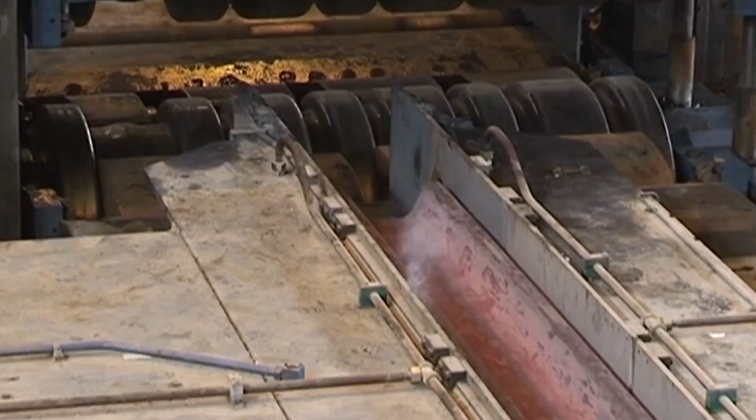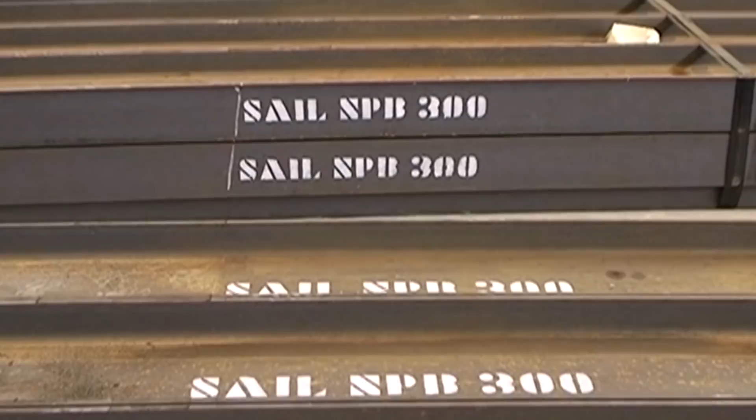Steel Authority of India Limited (SAIL) is the largest public sector steel producer in the country, which produces a wide variety of steel products at its state-of-the-art integrated steel plants across the country. After its modernization and expansion program, SAIL has a production capacity of about 2 million tons of structural steel, which makes structural steel an important contributor to the company's bottom line.

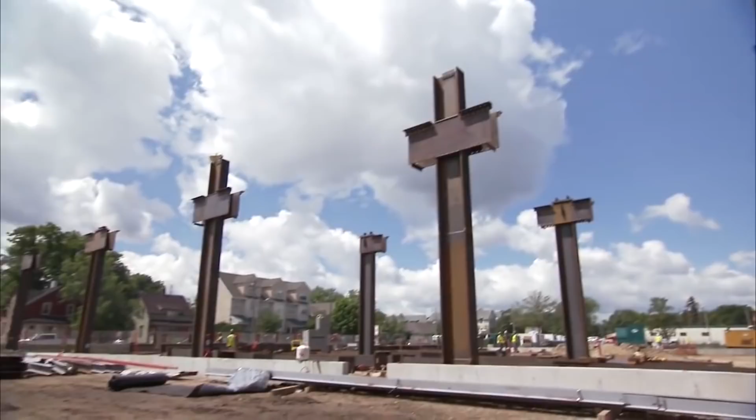Architects and builders are using structural steel to make buildings lighter, economical, safe, sturdy, and aesthetic in today's time and age. Such steel sections are replacing concrete sections due to their time-saving construction, as well as high strength-to-weight ratio. The high-rise structures today are constructed mostly using structural steel.

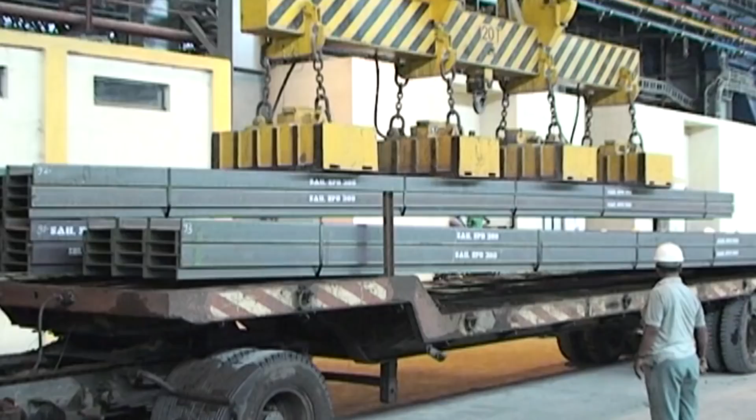Structural steel sections are a category of steel that are produced in a particular cross-section or shape and have specified chemical composition and mechanical properties for use in structural work. The shapes, sizes, composition, strengths, etc. of such sections are regulated by standards in most industrialized countries. Broadly, rolled structural sections are categorized into three types: angles, beams or joists, and channels.

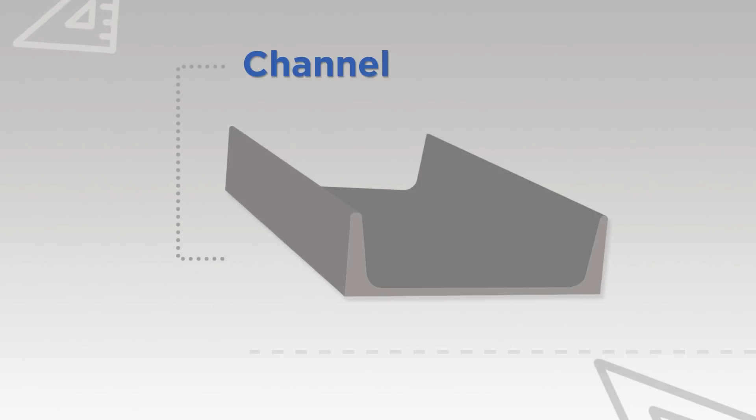In India, BIS codes regulating the nominal dimensions, mass and sectional properties of hot-rolled structural steel sections are IS 808-1989 for angles, channels and tapered flange beams, and IS 12778-2004 for parallel flange beams and columns.

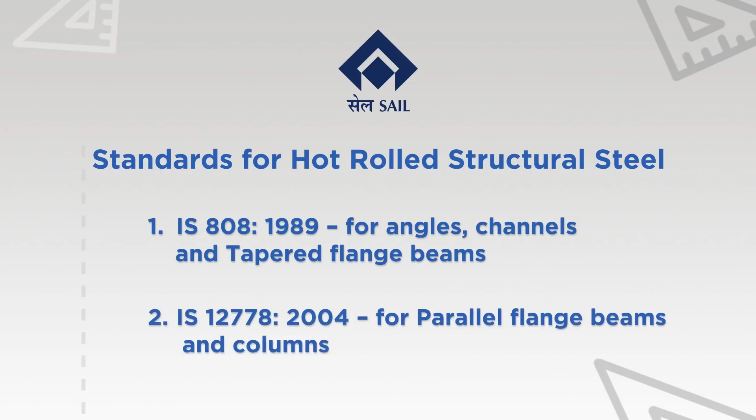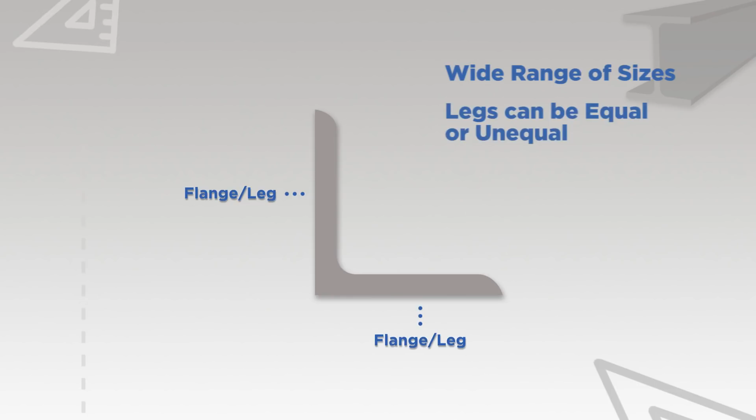Angle section. An angle section consists of two flanges, legs perpendicular to each other. They are available in a wide range of sizes in terms of their leg lengths and thicknesses. The legs can be equal or unequal depending on the requirement. Angles are designated by the length of their legs and the thickness of the leg. For example, 50 by 50 by 6 represents an equal angle with leg length of 50 mm each and thickness of leg of 6 mm.

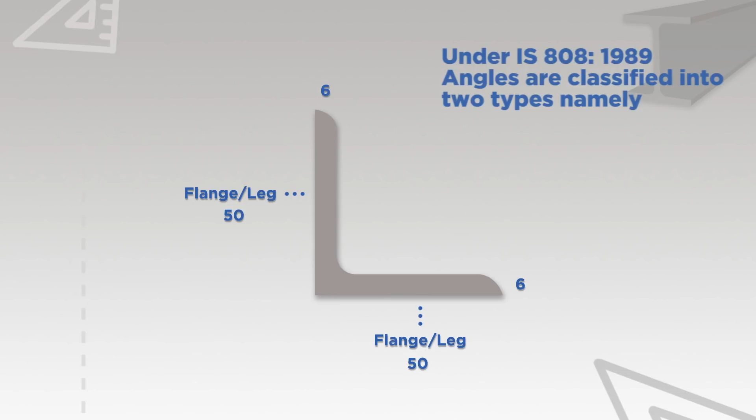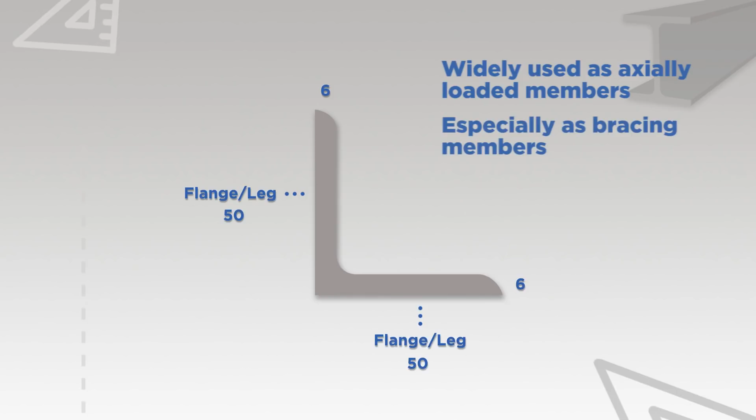Under IS 808-1989, angles are classified into two types, namely Indian Standard Equal Angles and Indian Standard Unequal Angles, both being designated as ISA. Angles are therefore widely used in structural design as axially loaded members, especially as bracing members. In a typical building construction, their usage as wall panel framing members and stiffeners in plated construction also is quite common, effective and efficient.

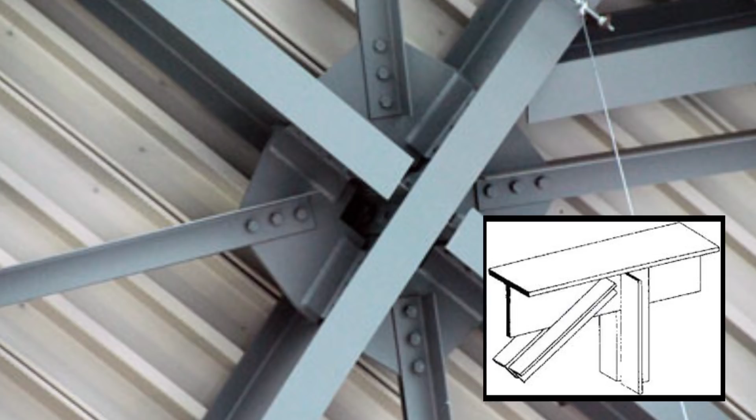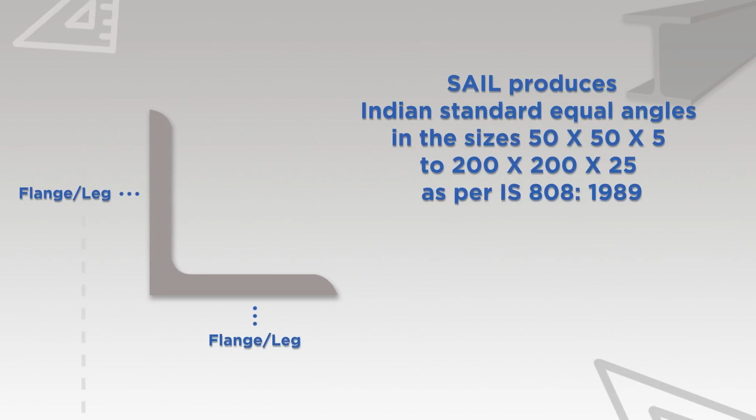SAIL can produce equal angles in the size range 50 by 50 by 5 mm to 200 by 200 by 25 mm with sectional weights ranging from 3.8 kilograms to 73.9 kilograms per meter.

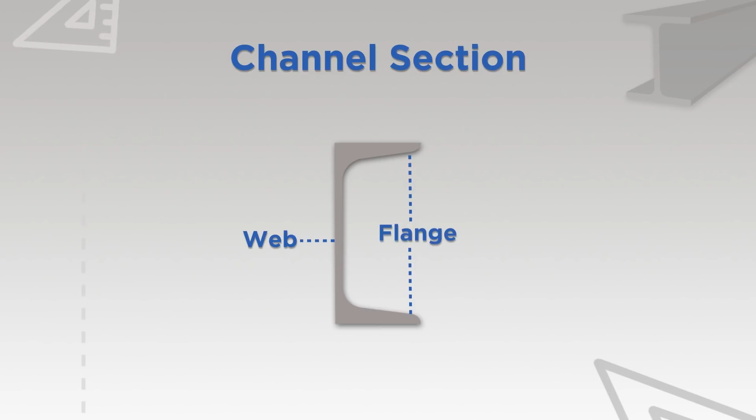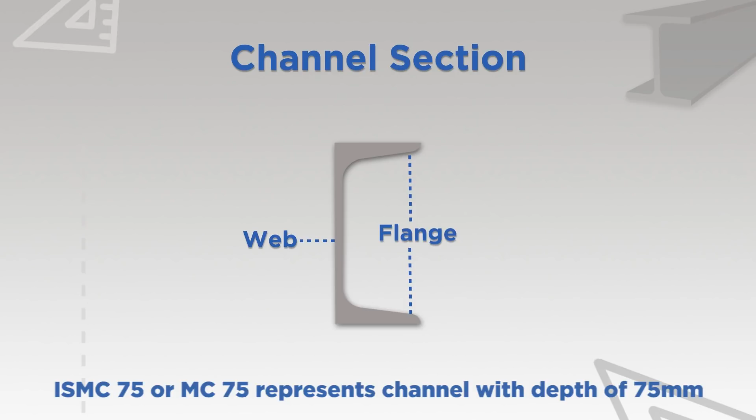Channel section. A channel is a hot-rolled steel section having a vertical web joining the top and bottom horizontal flanges with inside radius corners. Channels are designated by their abbreviation and the depth of the section. For example, ISMC 75 or MC 75 represents channel with depth of 75 mm. In some cases, the channels are designated by the depth and flange width, such as 75 by 40 mm.

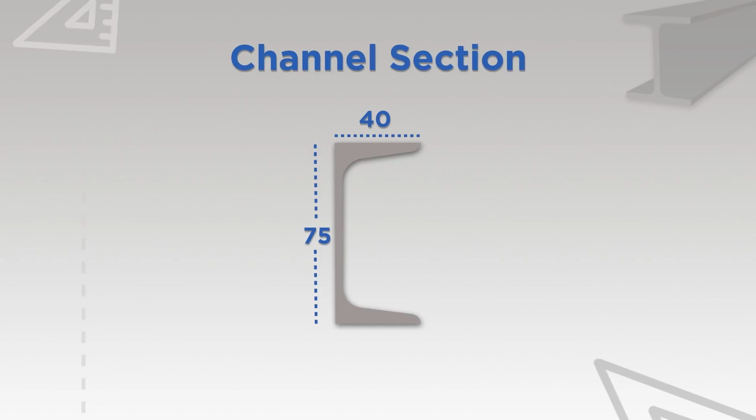The flanges separated through a web render the section a reasonable moment of inertia and section modulus. But due to lack of symmetry about the minor axis, the shear center of such section lies outside the section, which in turn makes the section unsuitable for carrying loads and bending moment about its major axis for a longer span unless the section is effectively restrained against torsion.

But combining two such sections using suitable battens, lacing or bracing, if the missing axis of symmetry in the resulting section is restored, it can be used as a significant load-bearing member in a structure. SAIL can produce ISMC 75 to 400 as per IS 808-1989 and UPN U section 200 to 400 as per DIN 1026.

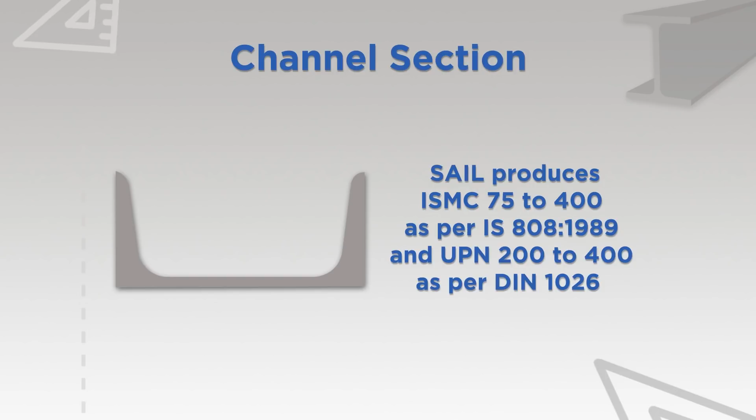Beam section. This section consists of two flanges connected by a web at the center, like an I or H. Presently, two types of rolled beams are available, that is, beams having tapered flange sections, whose inside flange surface is tapered, and beams having parallel flange sections, whose inside flange surface is parallel to the outside flange surface.

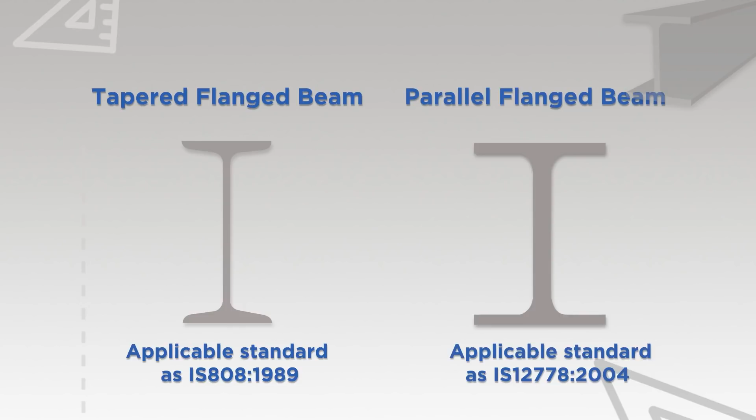Beams with tapered flange sections are covered under IS 808-1989 and beams with parallel flange sections are covered under IS 12778-2004. Under IS 808-1989, beams are classified into 4 classifications, namely Indian Standard Junior Beam, ISJB or JB, Indian Standard Lightweight Beams, ISLB or LB, Indian Standard Medium Weight Beams, ISMB or MB, and Indian Standard Wide Flange Beams, ISWB or WB.

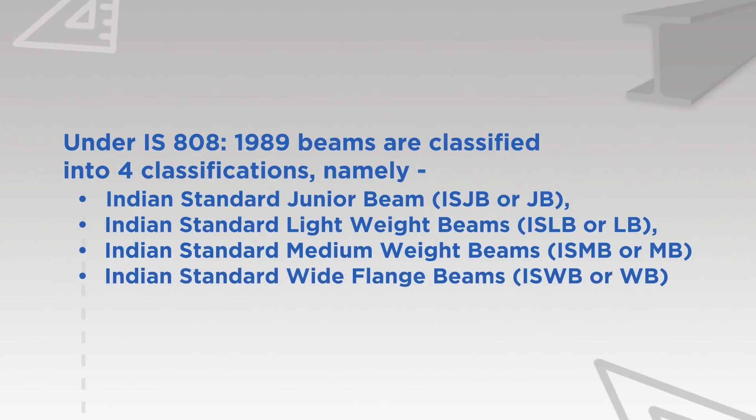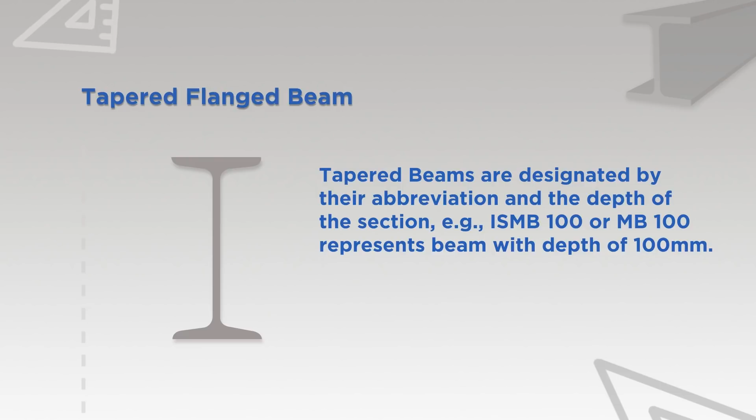Tapered beams are designated by their abbreviation and the depth of the section. For example, ISMB 100 or MB 100 represents beam with depth of 100 mm. SAIL can produce MB of depth 100 to 600 mm.

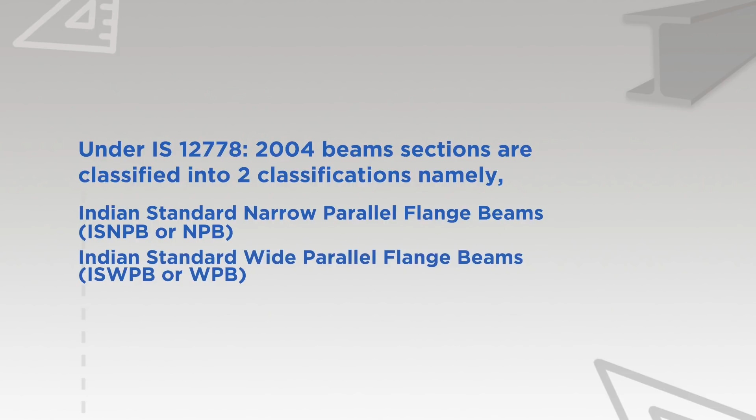Under IS 12778-2004, beam sections are classified into 2 classifications, namely Indian Standard Narrow Parallel Flange Beams, ISNPB or NPB, and Indian Standard Wide Parallel Flange Beams, ISWPB or WPB.

Narrow parallel flange beams are doubly symmetric shapes, generally used as beams whose inside flange surfaces are substantially parallel to outside flange surface. Beams under this standard have flange widths generally lower than the depth.

These beams are designated by their abbreviation, the nominal depth, nominal flange width, and mass of the section in kilogram per meter. For instance, NPB 160 by 80 by 15.77 means a nominal depth of 160 mm and a nominal flange width of 80 mm with mass of 15.77 kilograms per meter.

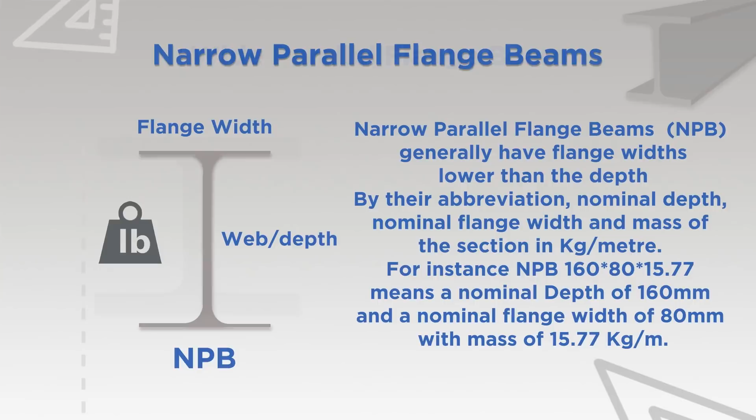Wide parallel flange beams, WPB, with nominal depth up to 300 mm have nominal flange widths same as the nominal depth of the beam.

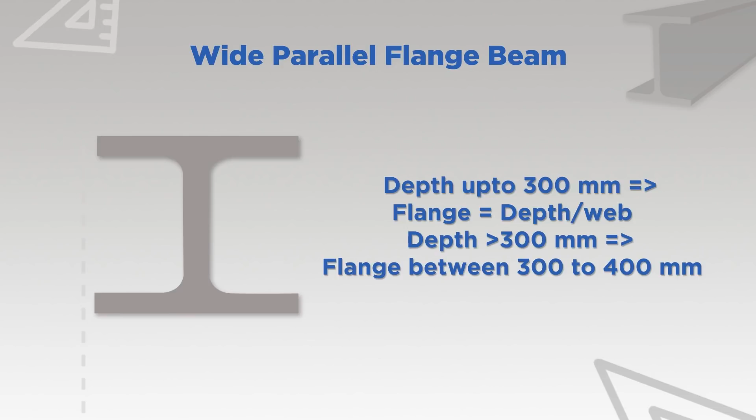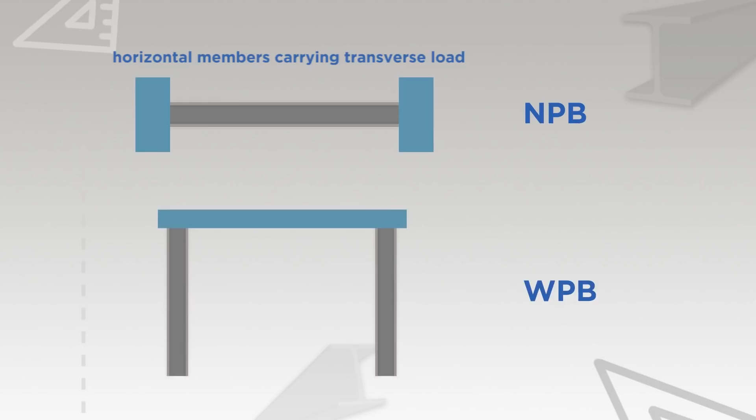WPB with nominal depth above 300 mm have nominal flange widths of 300 to 400 mm. Similar to NPB, WPB are also designated by their abbreviation, nominal depth, nominal flange width, and mass in kilogram per meter, for example WPB 160 by 160 by 23.83. NPBs are generally used in beam sections, that is horizontal members carrying transverse load, whereas WPBs

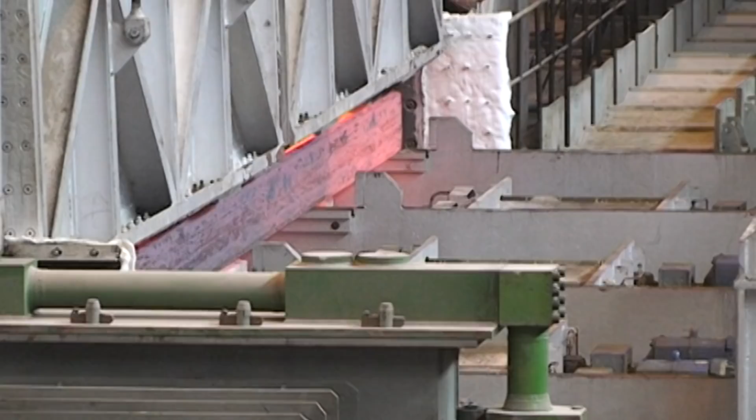are generally used in column sections, that is vertical members carrying axial load. Due to emphasis on economical use of steel in construction and better sectional properties, parallel flange sections are being preferred. SAIL produces parallel flange sections at its state-of-the-art universal mills at ISP Burnpur and MSM Durgapur. SAIL produces NPB of 100 to 750 mm depth and WPB of 100 to 450 mm depth.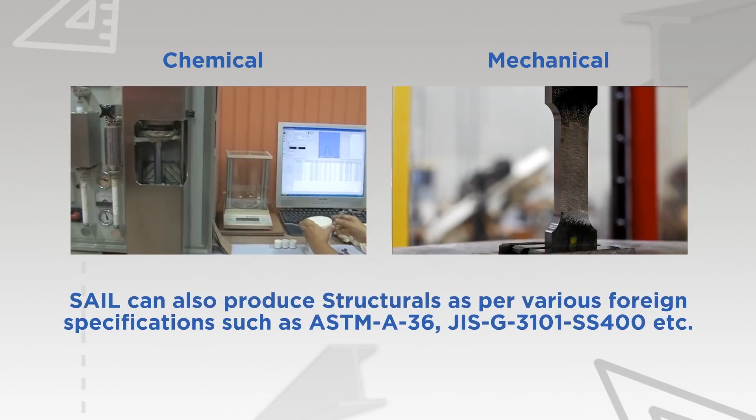SAIL can produce structurals with chemical composition and mechanical properties as per IS 2062-2011. SAIL can also produce structurals as per various foreign specifications such as ASTM A36, JIS G3101, SS 400, etc.

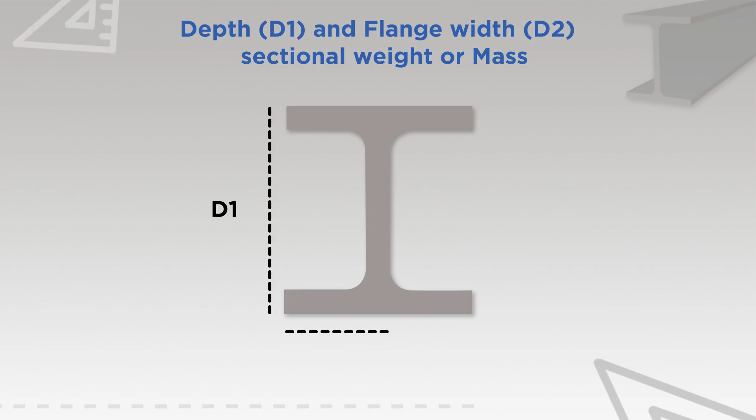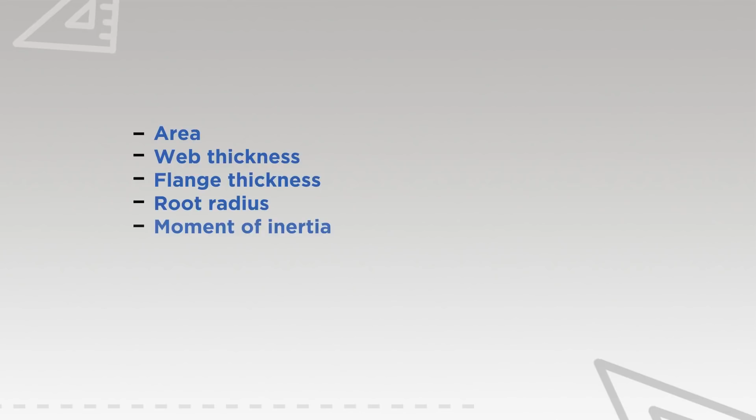When a structural engineer chooses a structural section of given depth D1 and flange width D2, and sectional weight or mass in kilogram per meter, along with this choice, he automatically chooses the sectional properties like area, web thickness, flange thickness, root radius, moment of inertia, radius of gyration, section modulus, plastic section modulus.

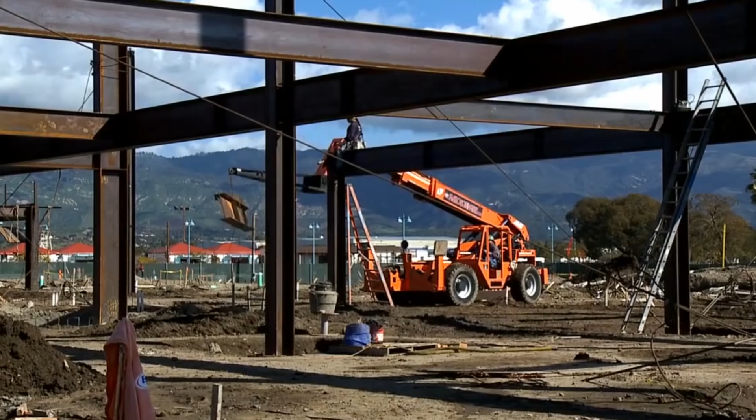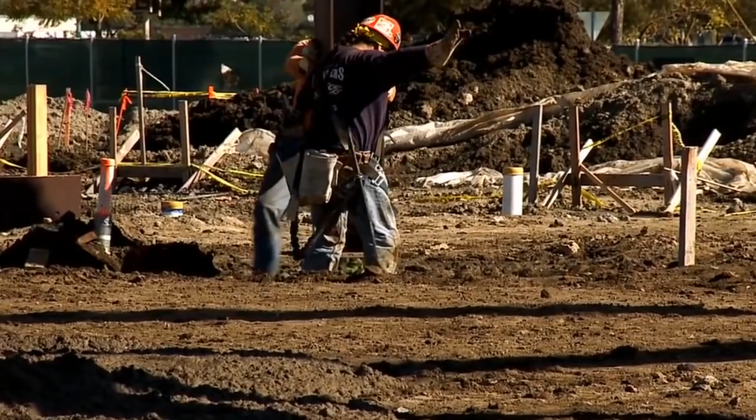A structural engineer has to consider the loads and stresses that the building being built will have to withstand, and the mass and sectional properties - that is moment of inertia, a measure of cross-sectional stiffness; modulus of section, a measure of strength of a beam; radius of gyration, a measure of a column's resistance to buckling about an axis, etc. - of different structural steel available before deciding on the appropriate structural steel to be used in the construction.

Previously, SAIL used to produce tapered beams of few dimensions only. Now, with the setting up of new universal mills at USM Burnpur and MSM Durgapur, it will be possible to produce NPB and WPB beams of various sectional weight.

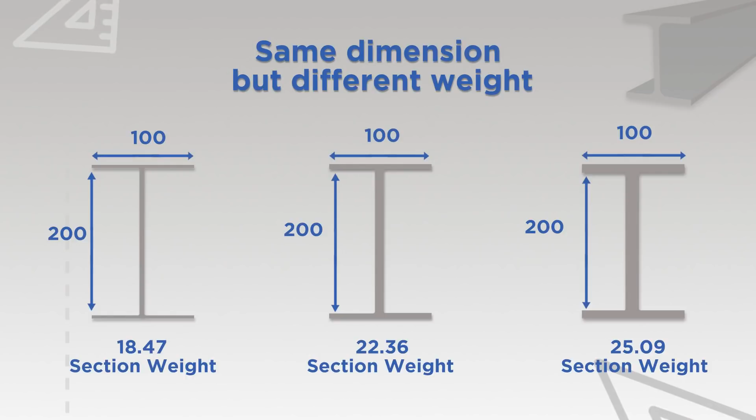Advantages of parallel flange sections NPB, WPB over tapered flange sections MB are that flanges in parallel flange sections allow efficient distribution of material in the cross-section, which results in higher section modulus.

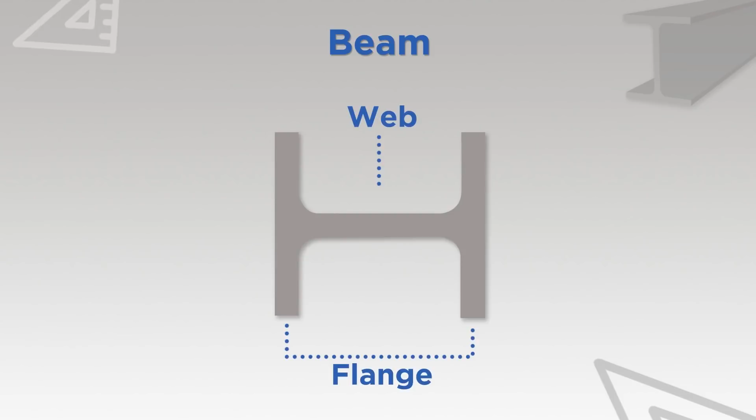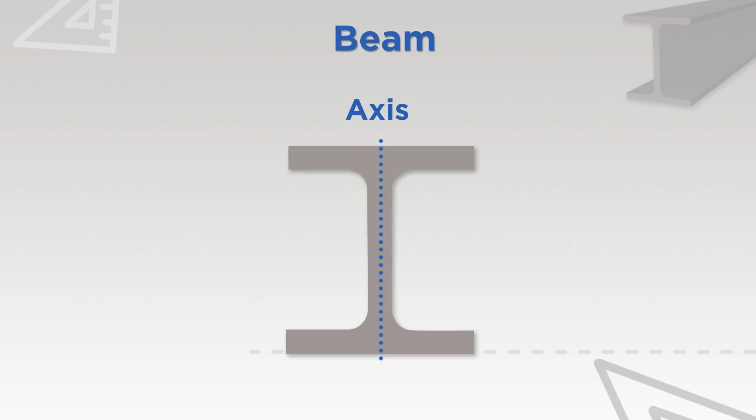NPB has a lower mass for the same section modulus about an axis. This means that it can carry more load with lower weight. When used as a bending member, parallel flange sections offer 15 to 30% saving in material.

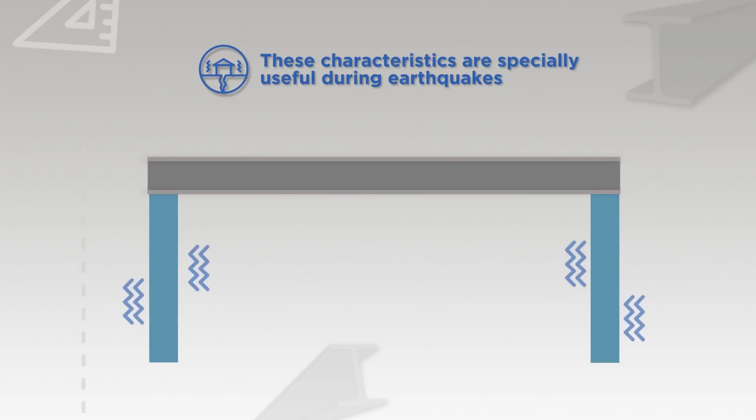WPB section is more efficient in terms of compression as it has a higher radius of gyration which can withstand buckling to a greater extent. It can lead to 30 to 40% saving of material over tapered sections.

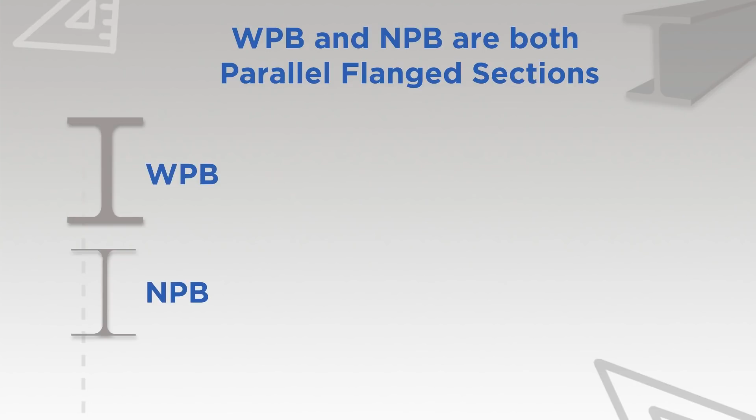Parallel flange sections are more efficient in terms of strength, workability, and economy. Connections are far simpler in parallel flange sections. Connections to flanges can be done by direct bolting without tapered washer.

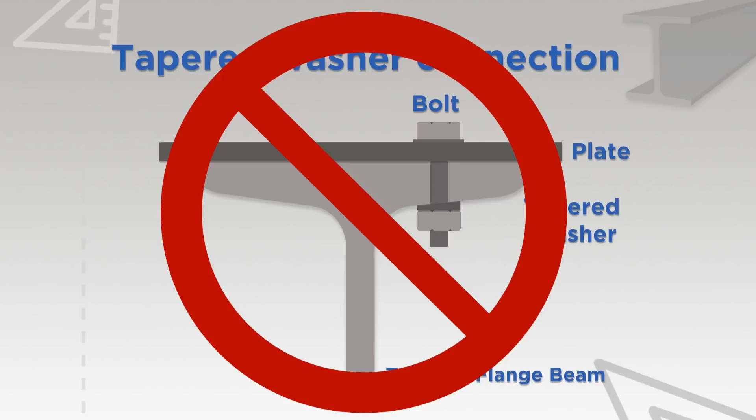Butt welding of plate at the edge of parallel flange section is easier. In case of tapered flange sections, only small-sized welds are possible between the cover plate and the flange tip. Moreover, proper welding between surfaces at such obtuse angles is difficult.

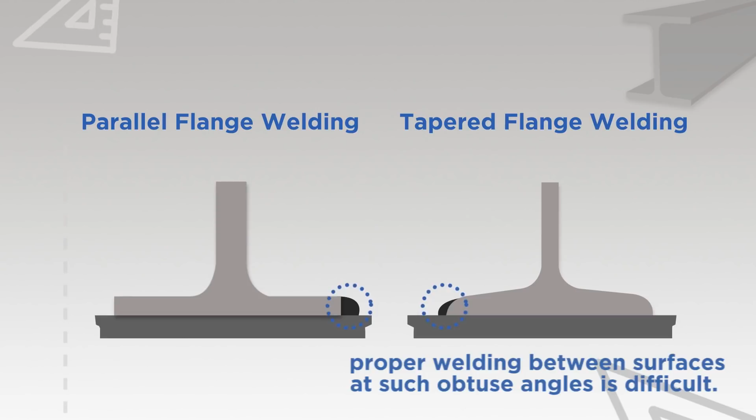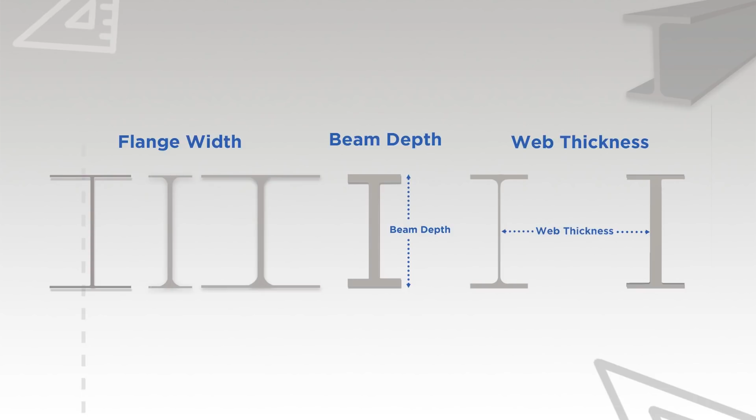In case of parallel flange beams, especially with respect to SAIL's new mills with universal rolling technology, more number of beams having same beam depth but varying flange width, web thickness, flange widths and weight per unit length will be available. This will give more flexibility to designers and economy to the owner to choose the most appropriate section.

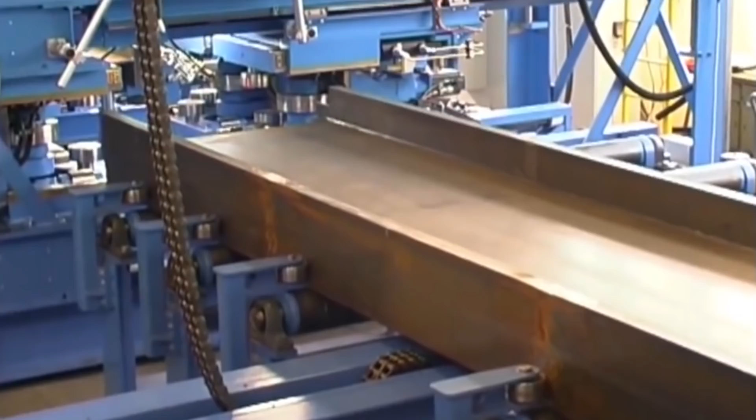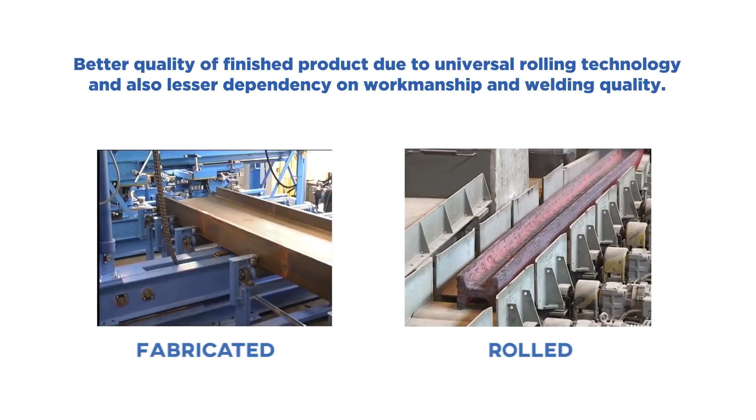Structurals can also be fabricated from plates by welding. The advantages of parallel flange sections, NPBs and WPBs, over fabricated sections are: residual stresses developed due to welding are minimized, greater savings due to lesser fabrication costs and lesser construction time, better quality of finished product due to universal rolling technology, and also lesser dependency on workmanship and welding quality.

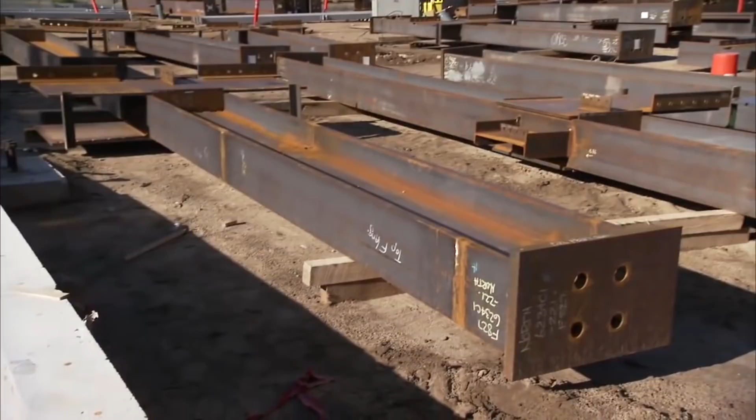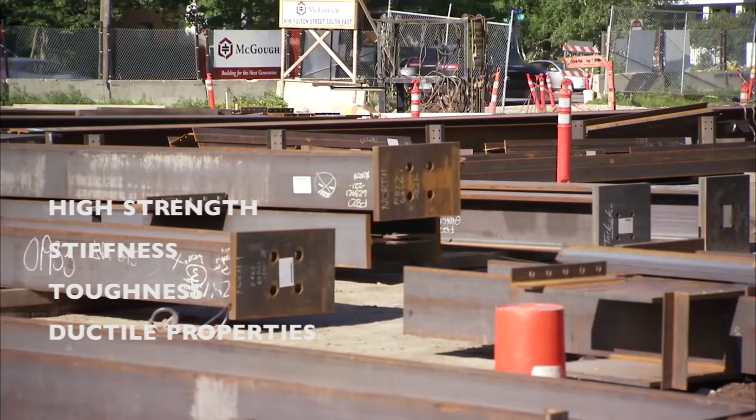Structural steel differs from concrete in its attributed compressive strength as well as tensile strength. Structural steel is one of the most commonly used materials in commercial and industrial building construction. Also, steel has high strength, stiffness, toughness, ductile properties and is environmental friendly due to being recyclable in nature. Depending on the scale of construction, steel-based buildings take 20 to 40% less time to be constructed.

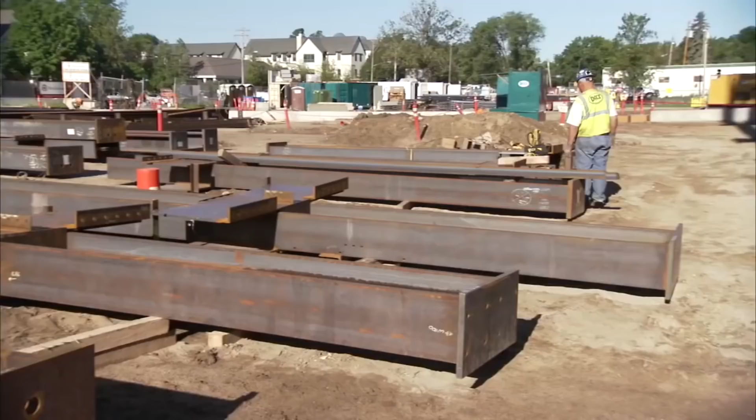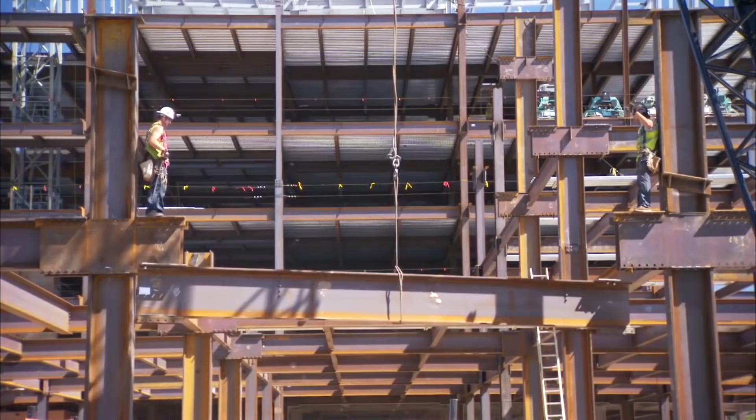Structural steel can be developed into nearly any shape, which are either bolted or welded together in construction. Structural steel can be erected as soon as the materials are delivered on site, making steel a schedule-friendly construction material. This reduces the site management cost by about 30% and overall building cost by 3 to 4%.

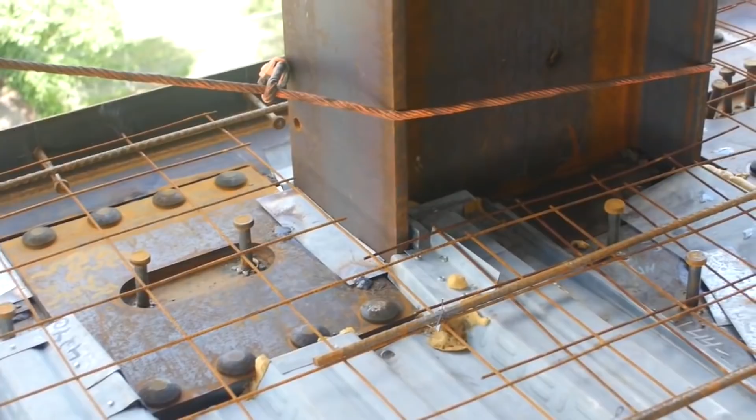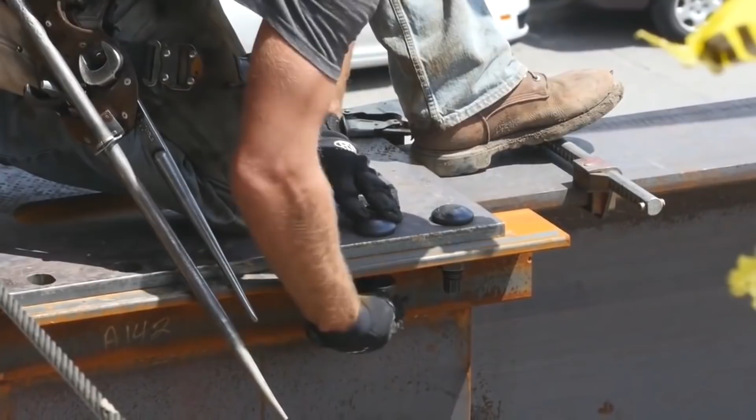Since steel sections in buildings are generally well exposed, they have relatively less crack propagation. If at all faults like cracks and corrosion are there, they can be easily identified and repaired. In addition to this, steel is inherently a non-combustible material.

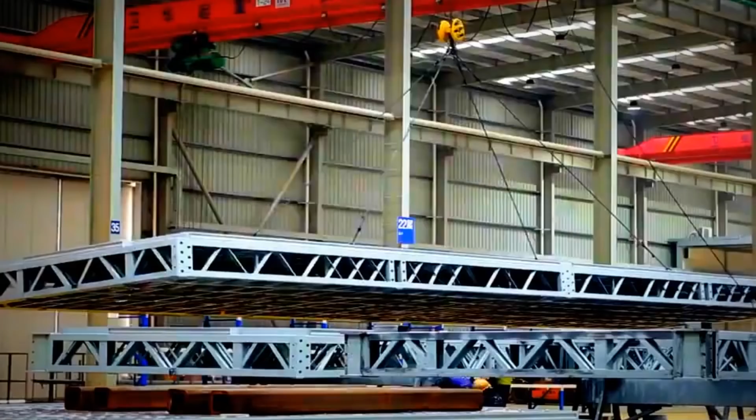The most important aspect of steel construction is that it is aesthetically appealing and can be changed or replaced very easily during the initial phases of construction. By virtue of all these attributes, structural steel will be the future of the construction industry, and SAIL, having established its new mills, is fully geared up to meet this demand.